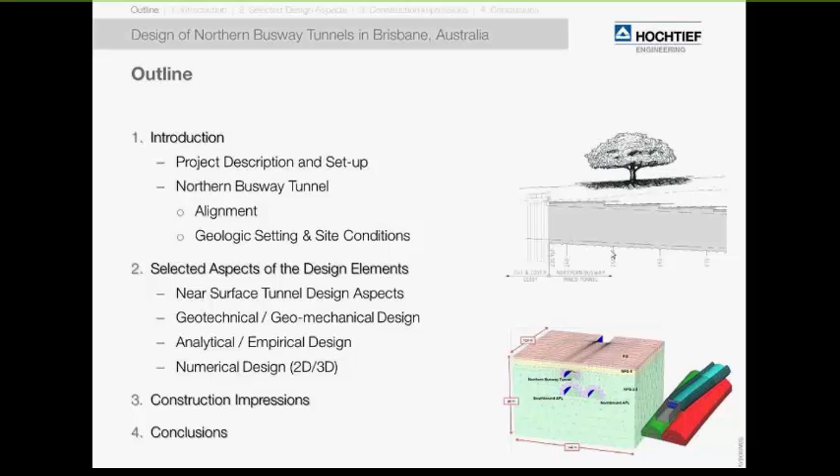On this map, we see an overall view of the construction, which includes actually 3 separate projects. So the Airport Link, the Northern Busway, and the Airport Roundabout projects are major infrastructure projects in northern Brisbane. These projects were developed to address the traffic issues in the Brisbane metropolitan area. Generally speaking, it is a motorway connecting Brisbane city to the northern suburbs and ultimately to the airport in the northeast corridor of this project.

The Airport Link, which constitutes the major package of this project, is delivered by a public-private partnership contract. This project includes 6.7 kilometers of toll road, which I would guess maybe 80 or 90% is underground, which is depicted here in this blue line. This contract package also includes 2 further packages, which are delivered for the state government, which are actually typical design and build contracts. This includes the Northern Busway and the roundabout upgrades at the airport.

I will give the details about the Northern Busway Tunnel in the next slides. So we are talking about a road tunnel dedicated just for bus traffic only, and the roundabout upgrade is at the end of this alignment. It includes surface redesign and big overpass bridge structures.

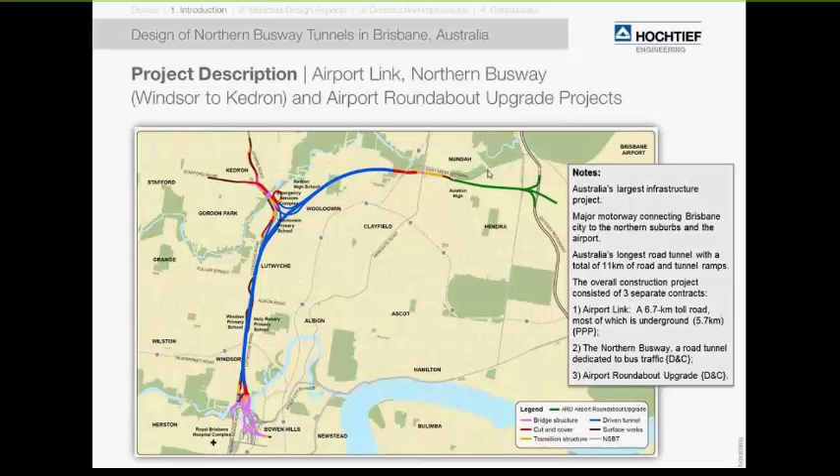The overall value of the 3 contracts was estimated to be on the order of 5.6 billion Australian dollars, and the Airport Link package included a volume of 4.7 billion, so it's a considerable amount of money. The project started in 2008. The construction works were completed within 4 years.

The PPP project is financed by a consortium called BrisConnections, which is currently operating the roadways and the tunnels and collecting tolls for a total of 45 years, with the state government paying for the additional busway and the airport roundabout upgrade projects. The contractors of this, I would say, mega project were Thiess and John Holland. The designers were Parsons Brinckerhoff and Arup. Both were engaged to deliver the detailed design for these PPP and design-build projects.

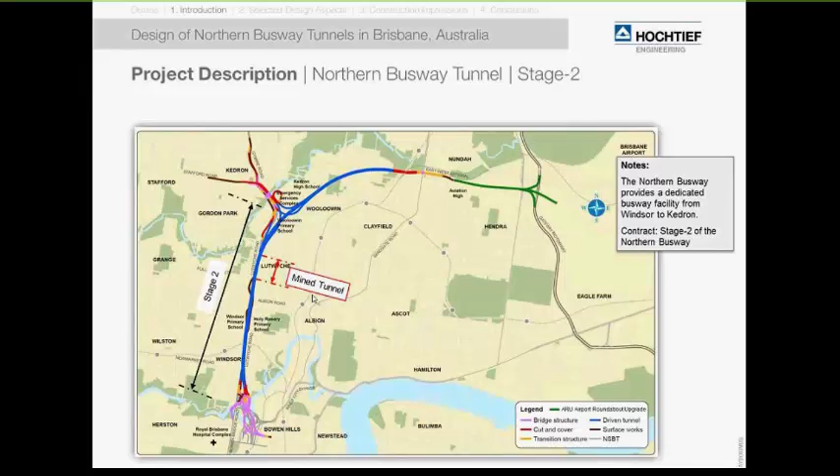including on-site services. On this slide, we see the stage 2 portion of the Northern Busway Tunnel. It is a 3-kilometer long 2-lane roadway for buses only, and it includes a mined tunnel section. The details of these mined tunnel sections we will see in the next slides. So actually on this slide we see the details: in plan view on the right-hand side, and also in the cross section, the geometries, the clearance, and the construction sequence of this busway tunnel.

The busway tunnel, as can be seen on the right-hand side, runs from south to north below a major urban arterial road. The horizontal alignment shows an S-curve following the right-of-way underneath the roadway, and it includes the construction of a large low-point drainage sump. I'm pointing at it with my pointer; it is indicated with this gray box. This is approximately the deepest location of the alignment.

On the typical cross-section on the left-hand side, we see in blue the busway tunnel, and in red the Airport Link mainline tunnels, which run in very close proximity to the busway tunnel with a minimum separation of 5 meters. The busway tunnel has a horseshoe-shaped profile. The crown is very flat, as we can see from this drawing. The excavated width is approximately 16 meters, and the full tunnel excavation height is about 9 meters. The rest of the dimensions can be inferred from this table.

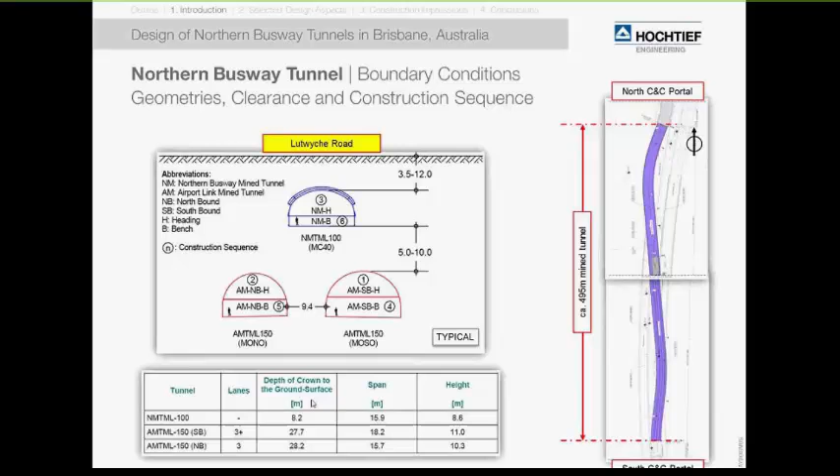In general, the top headings of the mainline tunnels are excavated first and supported, of course, and followed by the top heading of the busway tunnel. And these were followed by the benches in the same order, mainline tunnels first, followed by the busway tunnel.

On this slide, we see the vertical alignment and the geology along the busway tunnel. Let's first focus for a moment on the vertical alignment. The south portal is located at the left-hand side, and consequently the north portal is at the other end of the alignment. We see the location of the low point sump, which is the deepest location of the tunnel.

So the busway tunnel runs mainly through the lithological units Neranleigh-Fernvale, which I will talk about in a minute, abbreviated as the NFG, and in blue through the Brisbane Tuff. The tunnel also passes through a transition zone indicated here in yellow, which is located between both of these lithological units. The NFG in general comprises meta-sedimentary rocks.

So mainly we can talk about phyllites. They are in Brisbane quite horizontally foliated. The group of the Brisbane Tuff can comprise tuff, conglomerates, breccias, minor sandstones, and shales. The complex group of the transition zone comprises a mixed group of relatively unconsolidated but cemented channels of scree deposits, say small loose rocks.

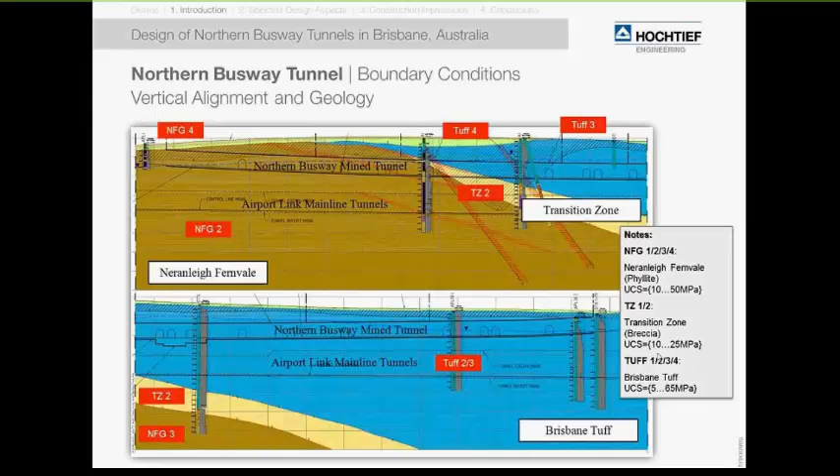Now, moving on with the first challenge of this project. At the southern portal, the ground and an area above the tunnel is occupied by a large Port Jackson fig tree. It is depicted on these pictures. We see on the lower picture the works showing the excavation of the portal area at the height of the crown of the tunnel.

This fig tree is actually a named tree. It was estimated to be about 110 years old, and as such, there was a vegetation protection order on it, and it had to be retained throughout the construction. The arborist reports said these trees generally have a root ball extending 1 to 2 meters into the ground. But in this special case, the tree found water sources within the fissured rock, so some roots extended up to 4 meters deep, almost touching the crown of our tunnel.

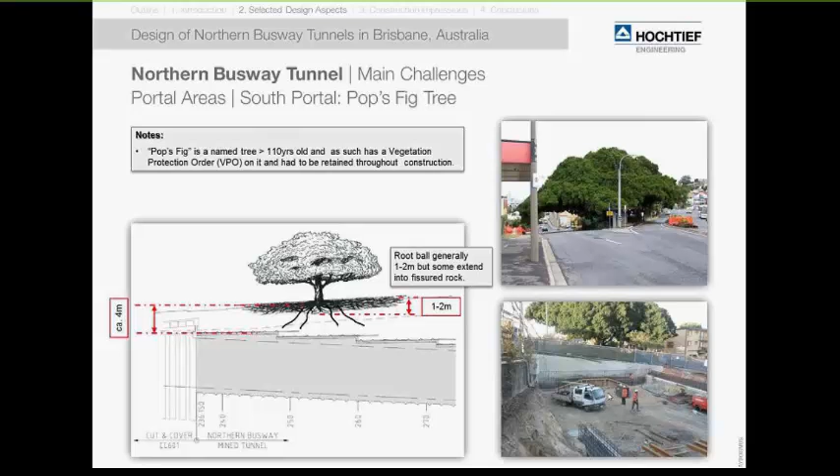Consequently, at the outset of the project, the tunnel alignment was shifted horizontally and lowered vertically to maintain as much root structure as possible, and to prevent damage to the root ball. I can share with you one situation. The biologist was of the opinion that we were damaging the root ball, and the construction was stopped for maybe one week until we made sure that the tree gets enough water as required.

We already heard about the low point sump. So here on this slide, we see an axonometric view and a typical profile at the location where the low point sump meets a niche. As it can be seen by the dimensions provided on the slide, the low point sump constitutes a very large opening by itself. So we're talking about 4-meter depth and 10-meter width.

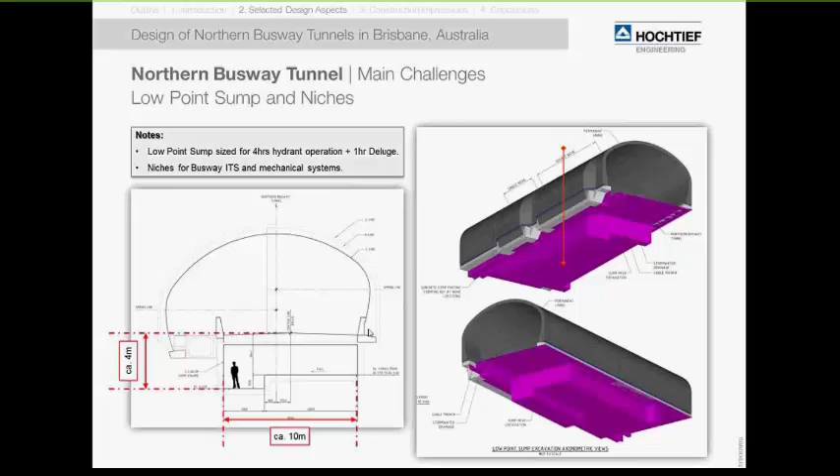Together, the niche with the low point sump provides an asymmetric shape of the tunnel, as we can see it on the left-hand side, which constitutes a challenge for the initial support design, but also for the final lining, and it needed to be addressed during the design. So there are actually more challenges on top of the geometrical issues related to the subsurface, let's say existing or future works, but I will get to this one later on.

Owing to its location being in an urban environment, and of course also being a shallow tunnel, the existing and future structures constituted an additional challenge for the tunnel design itself, in particular for the initial support and final support design. At one location, as shown here on the sketch, the tunnel was driving next to an existing shopping center basement with less than 3 meters of clearance. This constituted, of course, a challenge for the excavation, but also the initial ground support design, as any excessive deformation needed to be avoided to prevent damage to this existing structure.

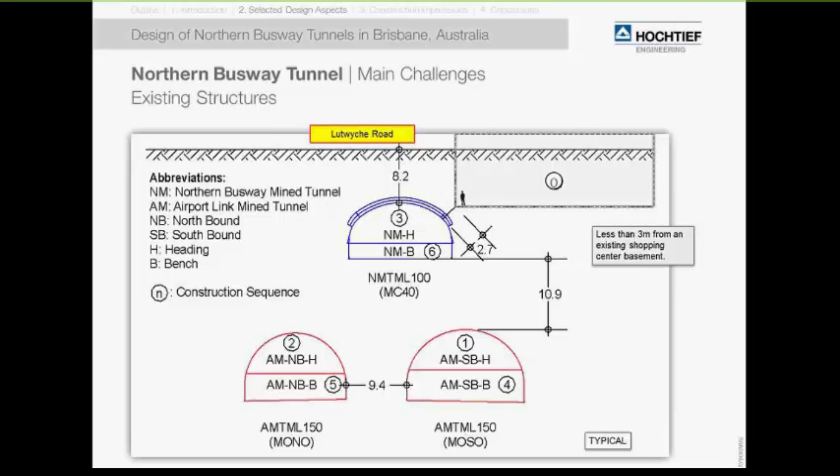On other locations, there were also plans for future structures. In this case, as it's shown here, a 7-meter deep excavation is supposed to be excavated upon completion of the tunneling works, or let's say during the operation of the tunnel facility. As you will imagine, that 7-meter excavation will provide an unloading situation, and it will disturb the stresses around the tunnel perimeter, and this will constitute a challenge for the final lining design. And interestingly, this effect needed to be addressed during the design development.

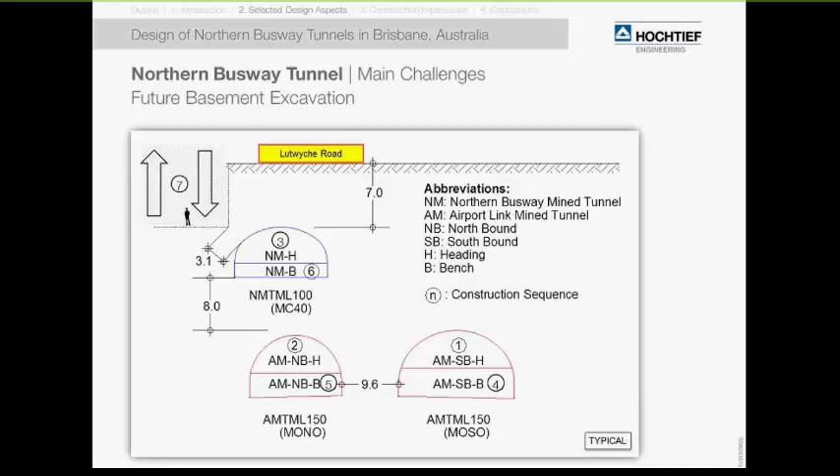As a summary of the challenges, I would say the key challenges for this shallow tunnel were definitely the low cover over the tunnel beneath a major urban road. At the south portal, the cover was at maximum 3.5 meters. Of course, we have seen also the geology. The geology is very variable along the alignment, and it provides a mixed face tunneling condition. And the properties of the rock were also ranging from surface residual at the crown of the tunnel to moderately strong or highly weathered rock characteristics at the tunnel face area.

As a consequence, the predicted settlement values and their potential to cause damage to existing buildings were very critical in obtaining an approval for the selected tunnel alignment. On this plan view, we see all the challenges summarized, and it gives us an indication of the selected calculation sections in addressing the geological and geometrical challenges of this project. The analysis and design included 2D and 3D computations along with several analytical design checks.

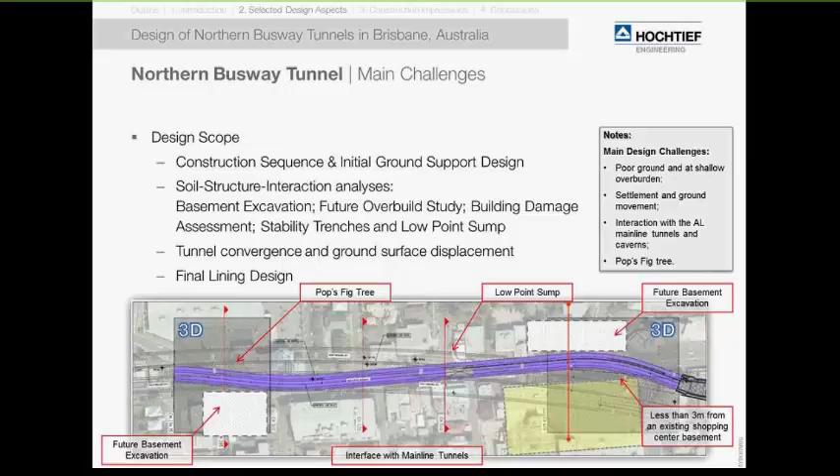So we were mentioning that the construction of the busway tunnel followed the NATM tunneling principles. And on this chart at the center of this slide, the flow chart is indicated for such a process. So generally speaking, we can subdivide this process into a design stage and a construction phase. And we see also in these red arrows that this process is an interactive process. I trust that the NATM or SEM tunneling process is known to us, but still let me just summarize the main aspects and the consequences of it for the design and construction of a shallow cover tunnel. If I would summarize it in very simple words, I would say the intention of the NATM is to activate the strength of the ground, as it is indicated on the sketches on the right-hand side.

Basically, the initial ground support will be inserted into the ground in order to form a ring-like or an arch-like structure to support the excavation. So we are trying to help the ground to support itself by arching. So the ground loading, which is acting on the initial ground support system, results in deformations, which we are continually monitoring. And these monitored deformations are compared with predetermined trigger values. This tool gives us the ability to continually verify our analysis results, and in cases where we have a deviation, it gives us the opportunity to adjust the initial ground support measures as required in the field.

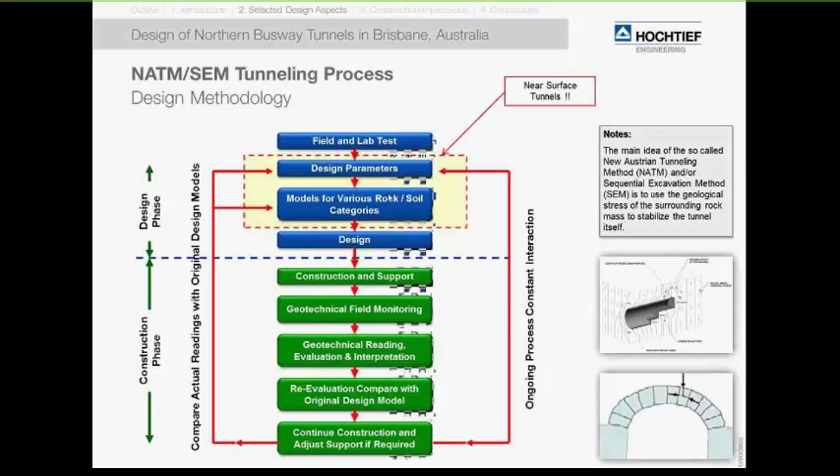Let's start the design with the geotechnical model. So on the right-hand side, we see typical bore logs for the lithology of the NFG materials. It represents the classes NFG3 and NFG4. And as with all projects, the borings constitute the starting point to develop a geotechnical model.

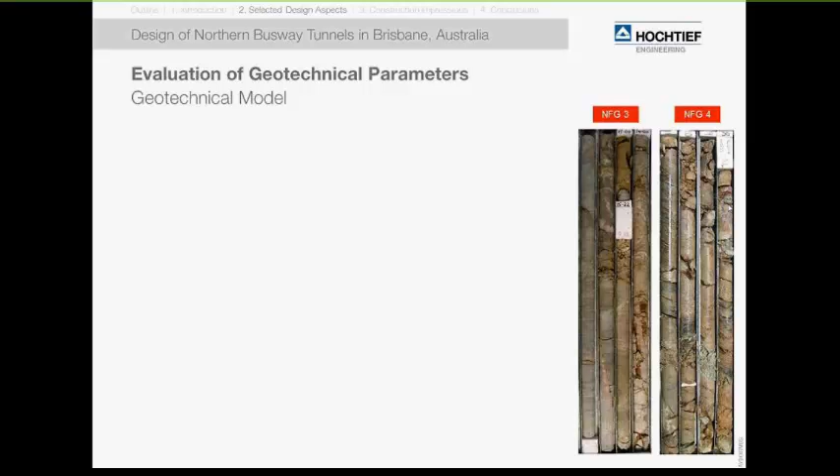But we also need to understand that in an urban environment, the accessibility of the ground for ground investigations is quite challenging. Often the best available boring locations are at an offset from the tunnel alignment. Let me show it, for example, on this geotechnical model. In this case, the boring upon which the model has been derived is at an offset of 60 to 61 meters away from the tunnel center line. Still, this boring constitutes the basis in developing the engineering model as we see it on this screen.

So the varying geological conditions make the interpretation even more difficult. To develop a realistic model, it really requires a good understanding of the local geological history, because we need to rely on or combine all information that we can gather together, and we need to have the ability to extrapolate all this data in 3 dimensions.

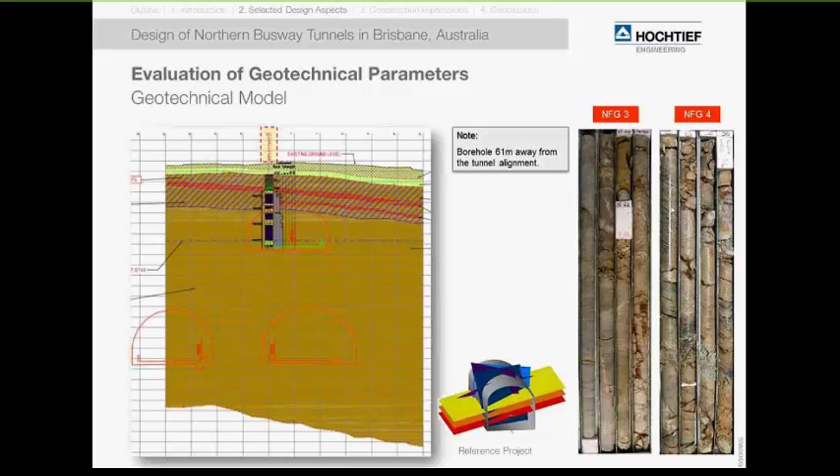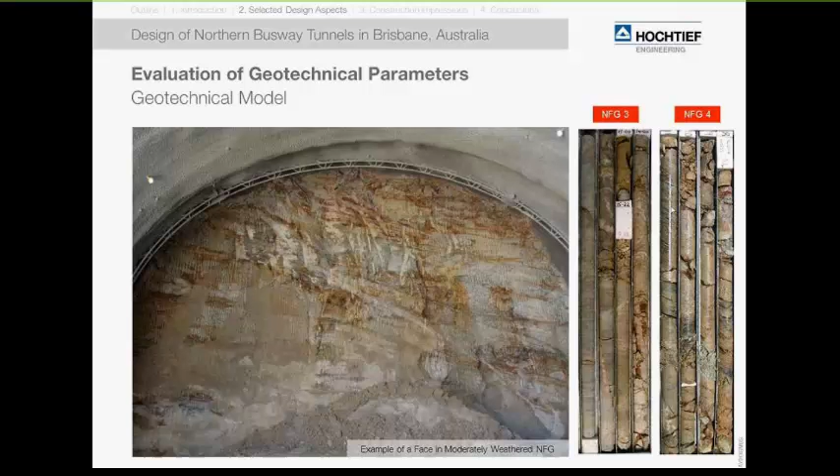Given all these uncertainties with the effects that we can have in the execution of the bore logs, the interpretation, the offset, etc., a constant iterative process or comparison between the assumed geotechnical models and the encountered ground conditions is a must. And this is one of the principles of the NATM. Here, for example, we see an excellent match between the assumed and encountered ground conditions. On the previous slide, we have seen the assumed ground conditions. This is the encountered ground condition approximately at the same stationing.

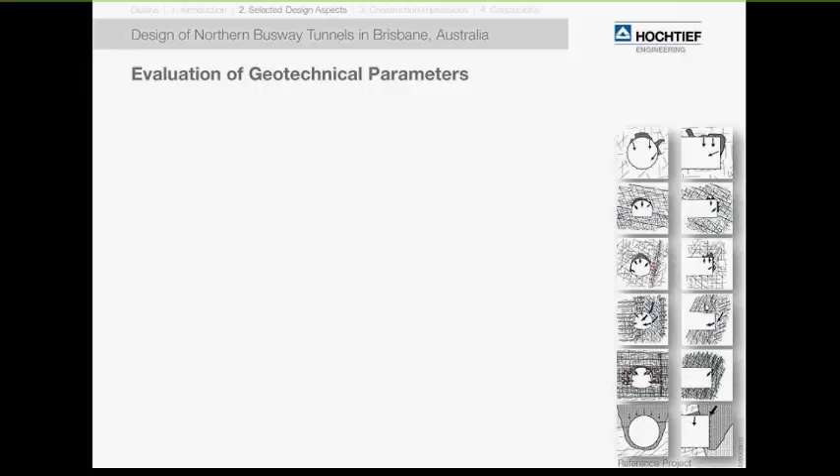But when we look at it in detail, you will appreciate that a blocky material, let's pick the 2 on the upper side, will have a different behavior than a highly weathered or fractured rock. Let's assume this behavior type. They have completely different behavior types or response to the excavation. So we can state that the rock mass behavior type forms the basis for the design of an excavation sequence and the selection of an appropriate design. Hence, the choice of the numerical model may be based on the analysis of the likely mechanisms of both the rock mass conditions, but also the rock mass behaviors.

Out of this, the consequence is that the geotechnical parameters will also need to be developed depending on the predominant failure mode. You will appreciate that a highly weathered and fractured rock will exhibit a stress-induced failure mode. This kind of failure mode will most likely be modeled with continuum analysis, so we need some parameters in order to simulate a continuum model. On the other hand, if you have a very fractured, blocky rock, this will more likely fail in a block failure mode, and these kinds of situations would likely be analyzed with key wedges or a distinct element method. And here, the discontinuity parameters are more relevant than the mass behavior.

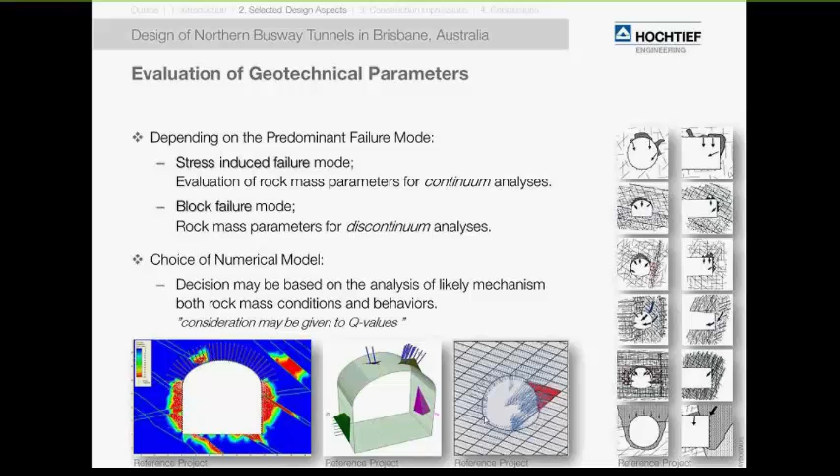Before I go to the evaluation of the geotechnical parameters, let me first summarize the fundamentals of the input parameters, as we need to understand the quality of the input determines the quality of the output. I just summarize here a few points. It is very important that the input parameters should be obtained from laboratory testing, if available, of course. And if you are getting some laboratory tests, usually the starting point is a geotechnical data report. What we need to do is check these results for plausibility. If we have some outliers and we can justify it, we should eliminate them.

And if the number of tests is sufficient, we should run a statistical model in order to account for upper bound, lower bound, or best estimate ranges for the analysis. This plays an important role, in particular, for a low-cover tunnel, but I will discuss this in the next slides. It's also important for me to emphasize that an engineer should definitely inspect the cores or the outcrops, get the core in hand, scratch it, get a feel for the material. It's quite important to justify the numbers that we are evaluating.

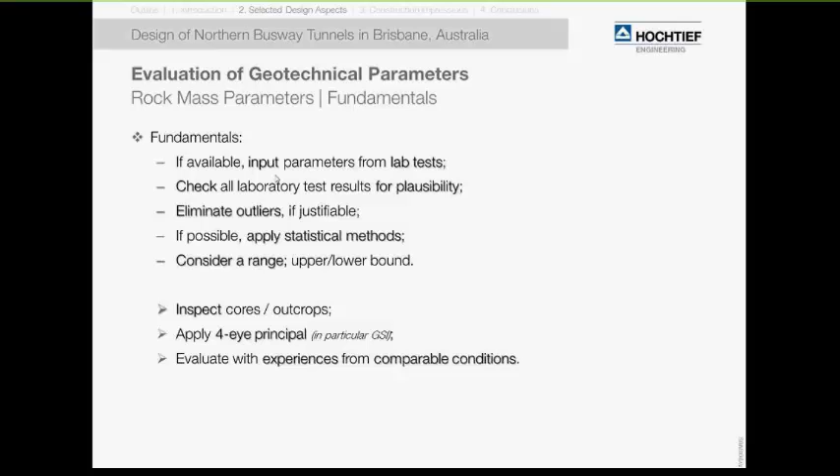In any case, I would also recommend to apply the 4-eye principle, in particular for the GSI values, because this is a very subjective interpretation and it is very useful to have a second opinion. And most importantly, and this applies to all geotechnical works, we need to consult a local geotechnical engineer and try to find out the experiences from comparable conditions.

Once we have all these fundamentals, we are getting into the determination of the rock mass parameters. Usually the rock mass strength and deformation moduli are commonly estimated using the Hoek-Brown criterion, which is widely accepted and applied in industry. The equation of the Hoek-Brown criterion at first view may read complicated, but in general terms it's quite simple, and it requires only a few input parameters to come up with the rock mass strength.

Important when applying, and this is actually applicable for all empirical models, is to understand the application limits. I have noted here the application limits for the Hoek-Brown criterion on the lower side. For example, at this extreme low end of the rock competence, let's say the GSI value is lower than 30 and the compressive strength is lower than 15 megapascals. So we are talking about a ground which is at the lower end of this GSI chart. So the discontinuities will play a lesser role, and the rock mass itself will be governing the matrix behavior. So this is quite important to note for near-surface tunnels.

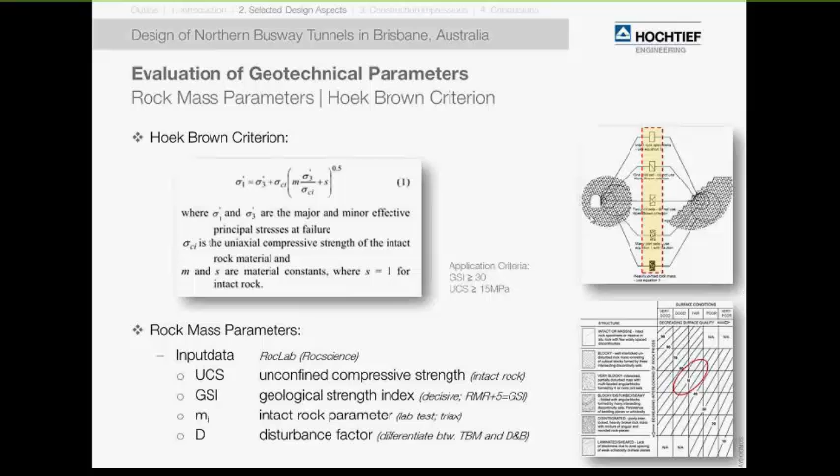Among other parameters which also need consideration while deriving the parameters for the rock mass are definitely the virgin stress field, groundwater conditions, and most importantly, and most people disregard this, the orientation and the opening of the excavation itself in relation to the rock mass structure, because you will appreciate that there is a significant difference between rock behavior at the scale of, let's say, a 15 to 16 meter wide excavation compared to a scale of 1 cubic meter of rock, which is more or less the intact rock.

Coming to the parameters, most conventional computer codes are formulated in terms of the Mohr-Coulomb failure criterion, and we as engineers are rather used to working with the friction angle and the cohesion than with the Hoek-Brown criterion. Some numbers are given here, so this seems a little bit arbitrary for us. And insofar we are trying to convert the parameters from Hoek-Brown to Mohr-Coulomb. In converting the shear parameters, we need to keep in mind that the Hoek-Brown failure criterion is non-linear parabolic, which distinguishes itself from the linear Mohr-Coulomb failure criterion. Hence the failure envelope range, let's say the stress range, is quite decisive for the Mohr-Coulomb fit. Depending on whether you are looking at lower or higher stress regimes, the shear strength values can be different.

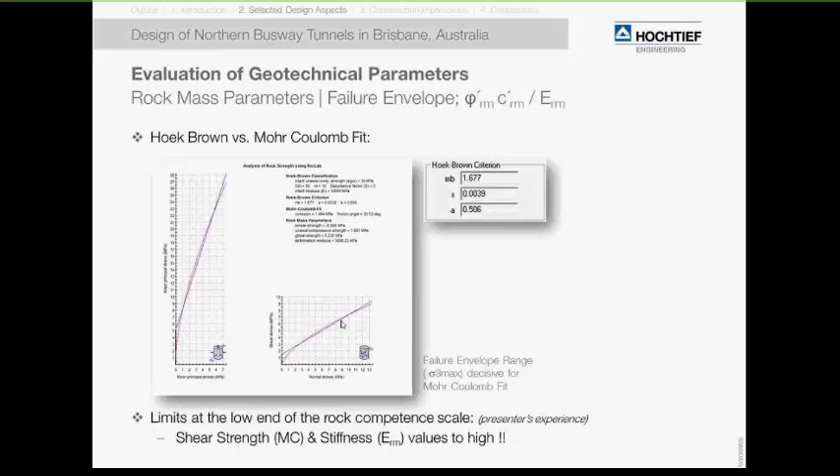Based on my personal experience, and based also on back calculations, I can state that the Hoek criterion has its limits at the extreme lower end of the rock competence scale. I would say the shear strength, the shear stiffness, the stiffness values of the rock mass are overestimated by using the Hoek criterion. So we need to be very careful in using the numbers for our designs.

And now let's move on to the numerical stress and strain analysis. In the earlier slides, when we were discussing the main challenges of the project, I was mentioning that 2D and 3D computations have been carried out. This included continuum and discontinuum analysis. But due to the shortage of time, I will just focus on the 2D analysis. And here, I will highlight two particular aspects of two-dimensional numerical stress and strain analysis.

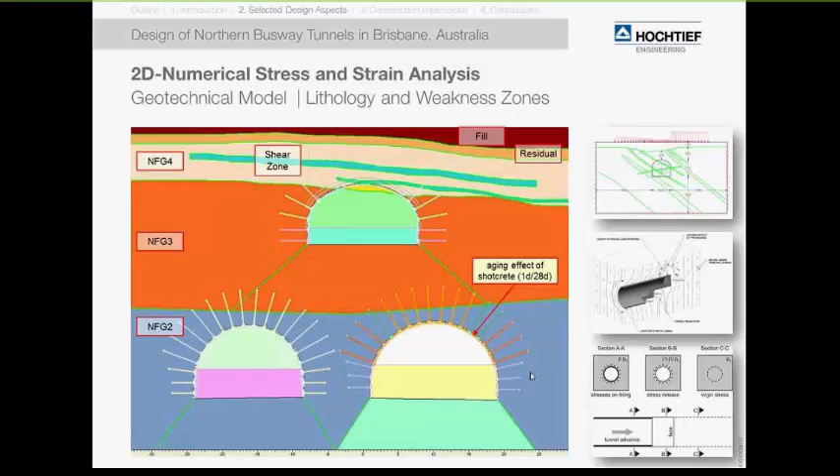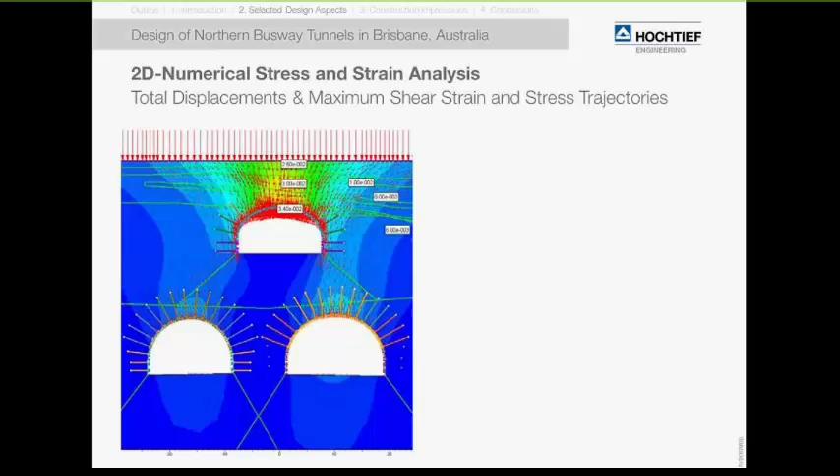The contours of the shear strain and stress trajectories on the right-hand side show us that the arching is developed only partially for the busway tunnel, and under these circumstances, a complete arching of the rock mass above the tunnel cannot be relied upon, and the initial ground support will have to be designed to carry the adverse ground loads, which result from the assumption of instantaneous installation of pre-support. This will include canopies or spiles to secure the tunnel advance and to prevent the caving process, as is also demonstrated here by the numerical calculations.

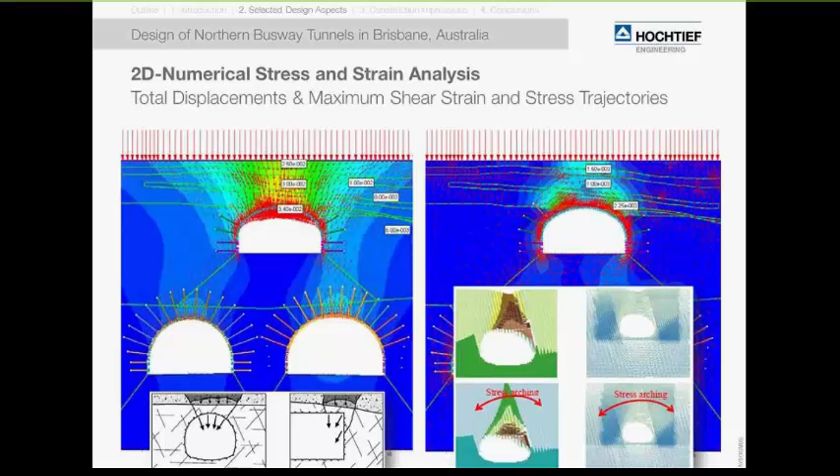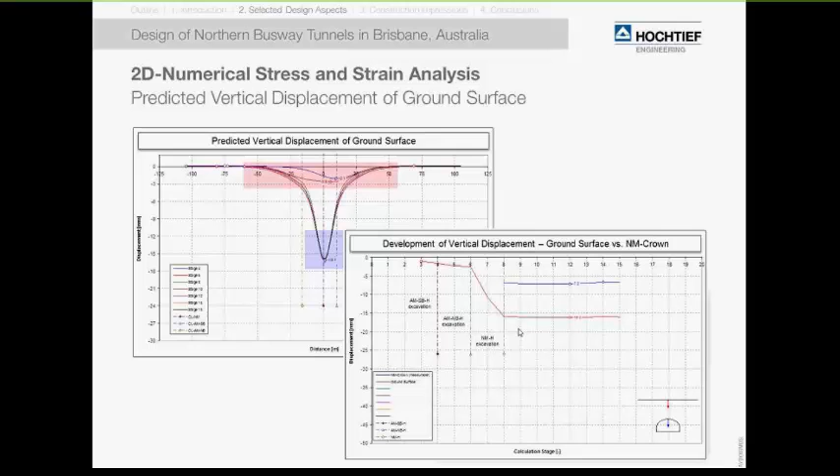Now the question becomes, how do we overcome the limitations of these empirical models in terms of shallow cover tunnels, in particular with relation to the stress release factors? One way would be definitely utilizing a three-dimensional numerical model. A 3D model also has its challenges, but a 3D model has two components. First of all, the complex geometry can be simulated in a more realistic way than in a 2D section. And secondly, and that's the most important part, in 3D we no longer need the stress release factors, and hence the results of a 3D model can be utilized for the verification of the stress release factors that we are using for a 2D simulation.

As already discussed in the previous slides, the portal areas of the Northern Busway Tunnel are situated in an area of low cover, where the cover of the tunnel consists of man-made fill or loose fills, underlain by very highly weathered rock of poor quality. Hence, the 3D FE model has been developed for the portal areas to assess the complex stress state and stress redistribution, to analyze the rock mass behavior upon the tunnel excavation in different stages, and to identify the critical stress states and the possible failure mechanisms.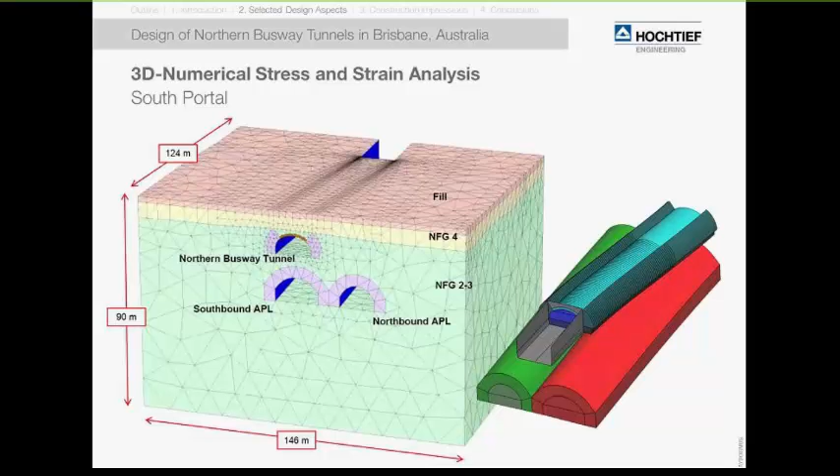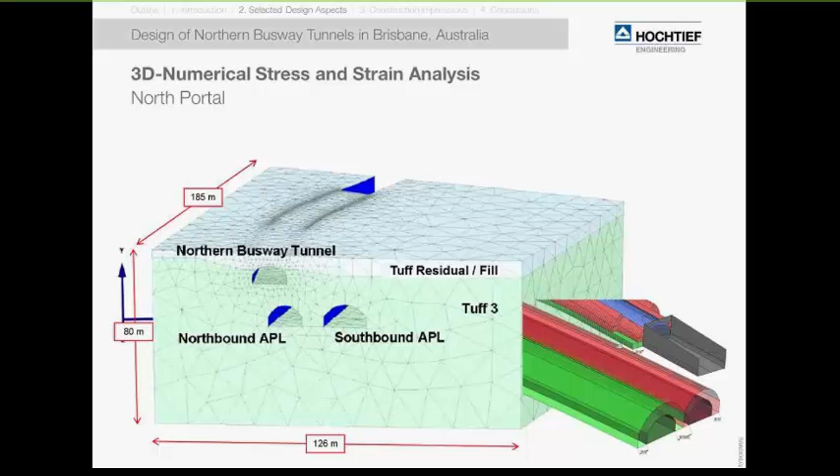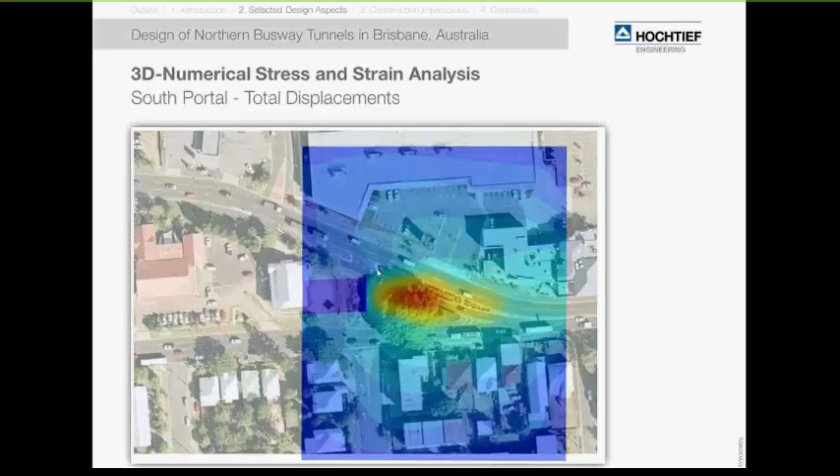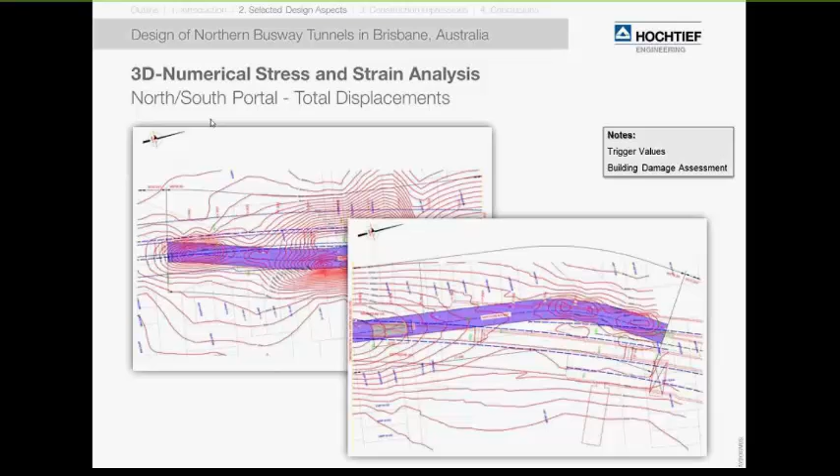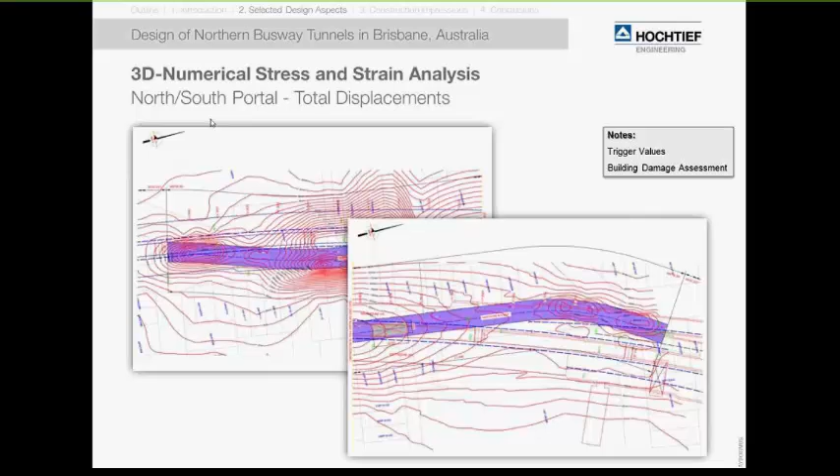All these results combined from 3D analysis and 2D analysis, when we superimpose them, deliver the complete picture of the displacement that we are anticipating caused by the tunnel excavations. And on this slide, we see a typical isochron map, practically lines of equivalent deformation values. These kinds of maps are quite useful. I would say they constitute the basis for the building damage analysis and also the zoning plans for building damages.

On this slide, I would like to demonstrate the value of a back calculation. We have here the difficulties with the geotechnical models, the complexities of deriving parameters, the complexities of simulating 3D effects in numerical calculations, etc. If we have an opportunity, we should definitely back calculate and verify our rock mass parameters. In particular, in a shallow cover tunnel, the E modulus is quite important. This is a very complex diagram. Let me summarize it this way.

We see here the comparison of predicted and measured ground surface displacement. The green arrow shows us the calculated settlement trough, and in red the measured values. In this comparison, we see an excellent verification of our rock mass parameters. We were very lucky that we could calibrate our model and the rock mass parameters based on the measured values which we obtained from the mainline tunnels. This gave us great insight into the behavior of the rock mass in order to calibrate our numerical models, which we utilized for the shallow cover tunnel. And I would also like to emphasize, even in a rock mass, we are able to simulate the deformations quite realistically, even utilizing the Mohr-Coulomb failure criterion.

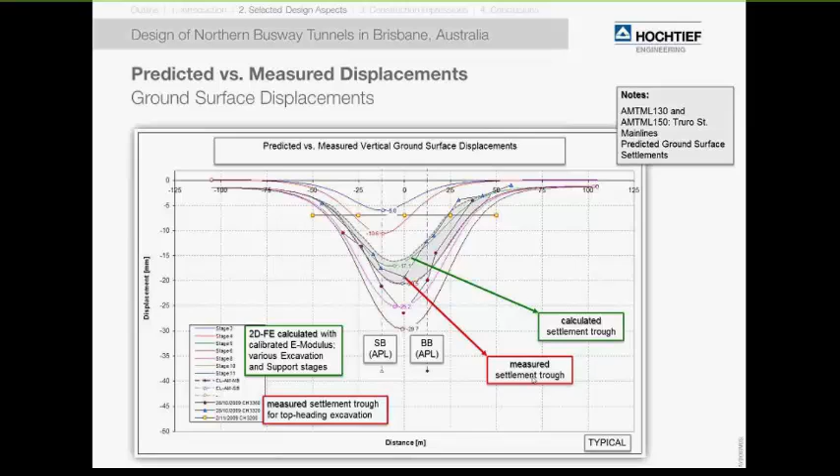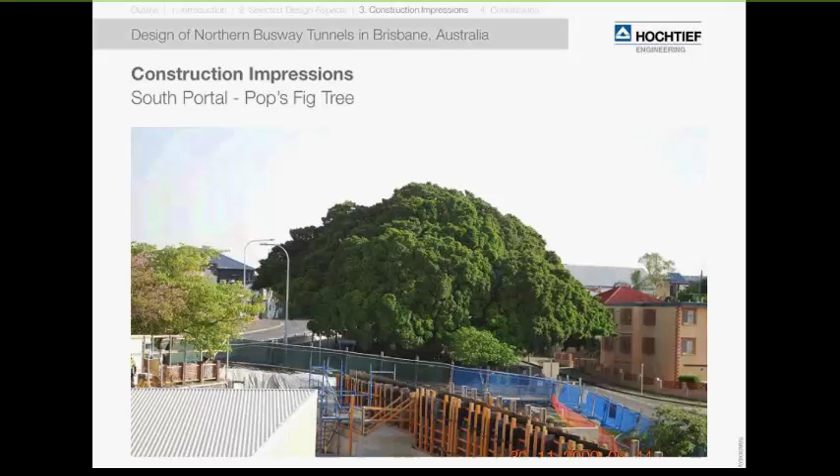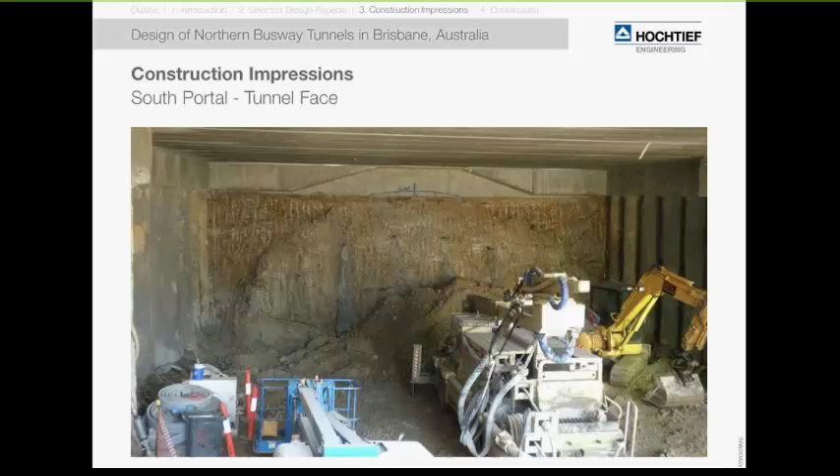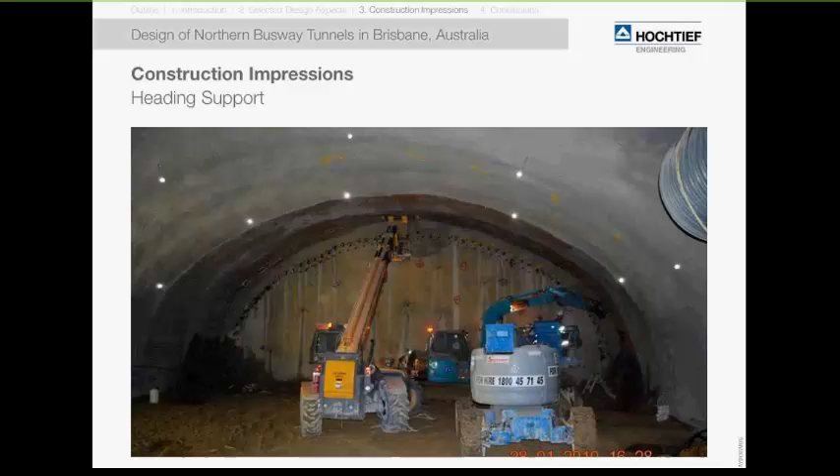Now, I would like to share a few construction impressions. That's the Pop's fig tree. I can tell the construction has been completed and the Pop's fig tree survived all the construction works. We see the construction works at the tunnel face. This is the starting of the tunnel at the south portal. This is more advanced in the tunnel. We see the canopy tubes and some works at the face. We can also see some face bolts at the face.

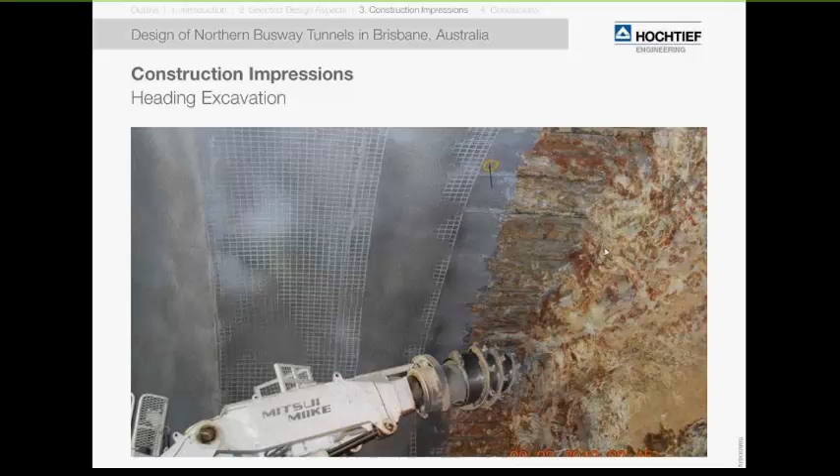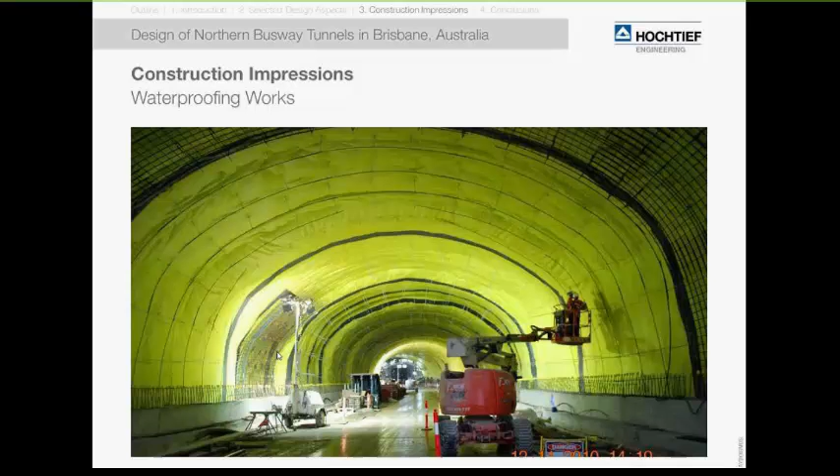Yeah, coming to the conclusions. I hope you can take away 3 points from this presentation in regards to the near surface tunnel aspects. Let me summarize it. The rock mass parameters: in regards to these parameters, the Hoek-Brown criterion is conditionally applicable, and my recommendation would be continuous calibration of the geotechnical model, but also the rock mass parameters. If we have any measured values from tunnel excavations, this will give us a much better prediction. In particular, the E modulus is quite often important for the rock mass when it comes to the deformations of shallow cover tunnels.

When simulating in 2D, the pre-release factors are quite of importance, and we just heard that the classical convergence confinement methods are not applicable or only conditionally applicable. And here, my suggestion would be to run a 3D FE analysis or run sensitivity analysis to evaluate the effect on the deformations and on the structural forces in the lining or the anchors.

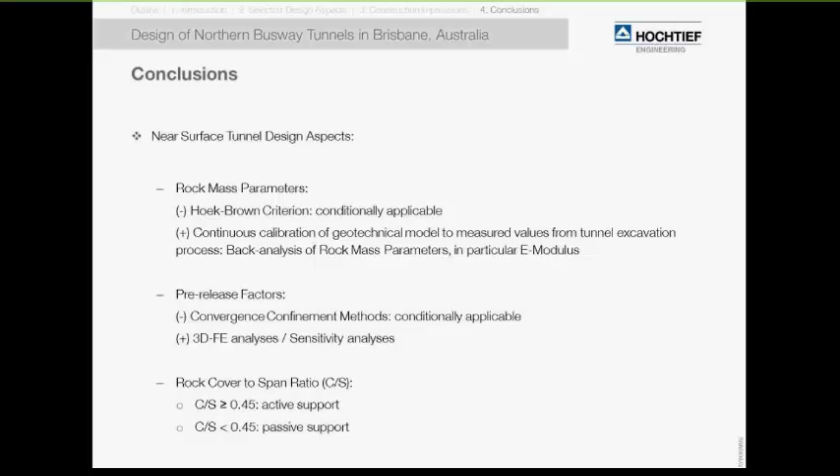Also of importance, the rock cover to span ratio. So we were successful in giving this criteria. The criteria is, if we have a cover to span ratio less than 0.45, then we need a passive support. By that I mean we need to take the rock loads by the shotcrete shell. An active support would be dealing with the stresses and the deformations by, let's say, rock bolts.